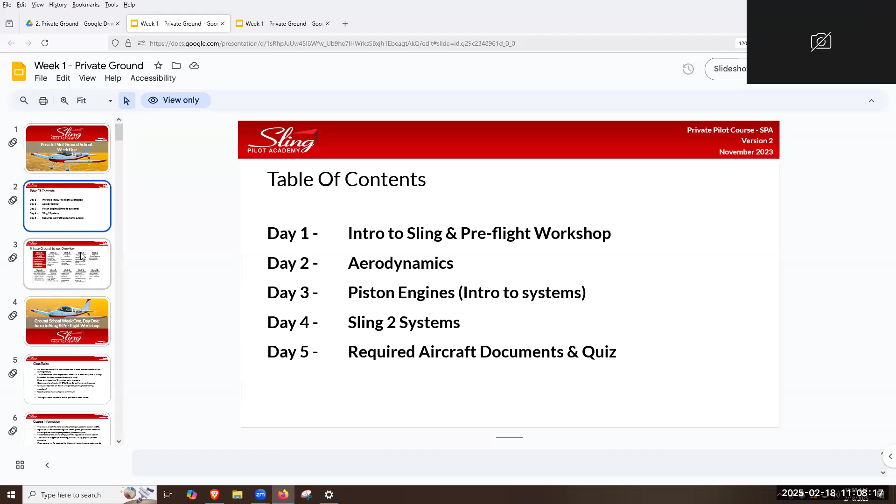Okay, so here we are on day two of week one. We're going to be covering aerodynamics. Yesterday we went over the intro to Sling and all the housekeeping stuff, and we did the pre-flight workshop. Hadley, I'm sure you did your pre-flight with your instructor yesterday. We need to do another walkthrough, we can. Today will be aerodynamics. It's kind of a bigger topic, so we have a lot to go over. I think we should be able to get through all of it today, but we really want to take our time through it and understand it. It's one of the more important topics, so we'll try our best to get through it, but take our time.

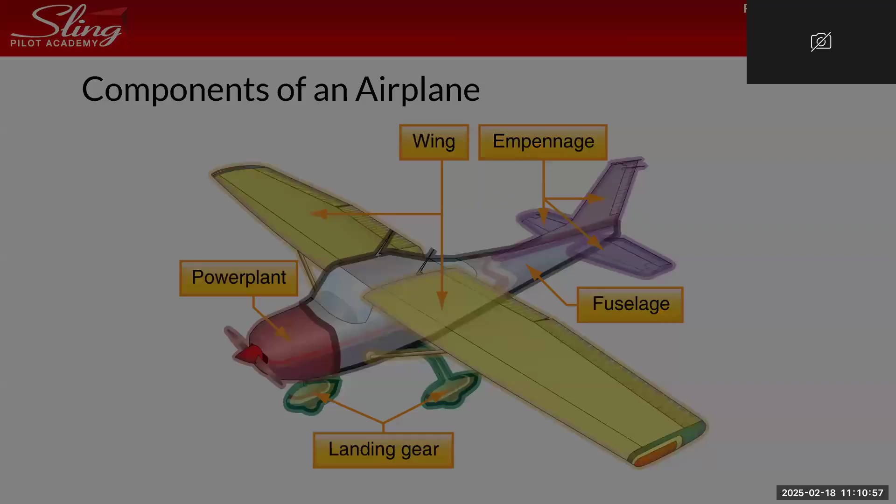And I heard that the last IFR class that just happened, she got a standing ovation at the end. So I'm not saying I expect that, but I expect that.

So let's go more in depth on the fuselage and the empennage.

Right here on the empennage, from this component back, we have different surfaces. The horizontal stabilizer is that horizontal surface that runs through the fuselage. During the pre-flight, you can press down where the rivets intersect on the horizontal stabilizer, and you can literally lift the nose of the airplane up. That's how light it is.

Attached to the horizontal stabilizer is the elevator. The elevator is controlled with the control stick, the joystick, with that forward and back motion. So the elevator is what controls your up and down motion.

Attached to the elevator, we have a trim tab. In our airplane, the trim tab is electronic. So once we get more into systems, you'll learn how the generator powers the battery, which powers the trim tab. On our joystick, there's going to be two buttons.

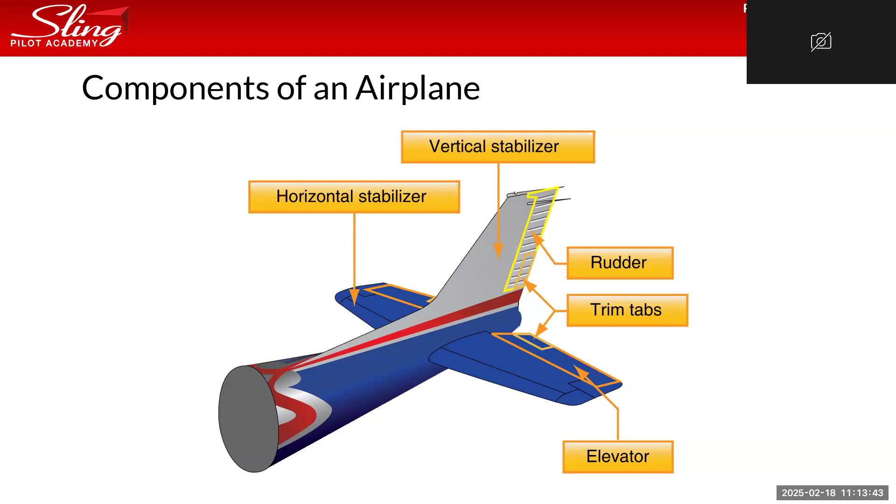Next we're going to get into the four forces of flight. These four forces are happening continuously at all times during flight. We'll go a little more in depth about them right after this picture. But essentially we have thrust, which comes from the power plant and the propeller. That's what moves us forward through the air. That is opposed by drag. There's different types of drag, which we'll talk about.

Then we have lift and weight. Lift, there's some physics behind that, which we'll get into in a few slides. And then weight is essentially gravity and the weight of the airplane wanting to go down towards the earth. In straight and level flight, these are all in equilibrium. They all are equal, but in different phases of flight, one might be more than the other.

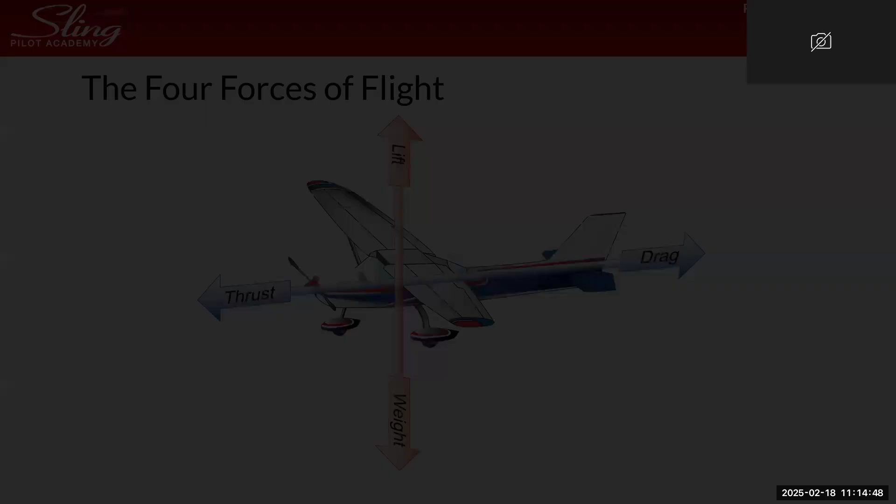So first we're going to talk about lift. Lift is the upward and vertical movement that opposes weight. You as the pilot control the lift, using the primary flight control, the elevator, with that forward and back motion. So you determine how much lift you want the aircraft to make or not make. This only occurs when the plane is moving forward, so you need airflow. The airflow is going to be present over and under the wings. We're going to talk about something called Bernoulli's principle and then the Venturi effect. That is the science behind how airplanes fly and create lift.

Bernoulli's principle and the Venturi effect create differences in pressure on the upper and lower surface of the wing. We'll talk about that in a little bit, and hopefully that makes more sense. Any questions about lift? No, cool.

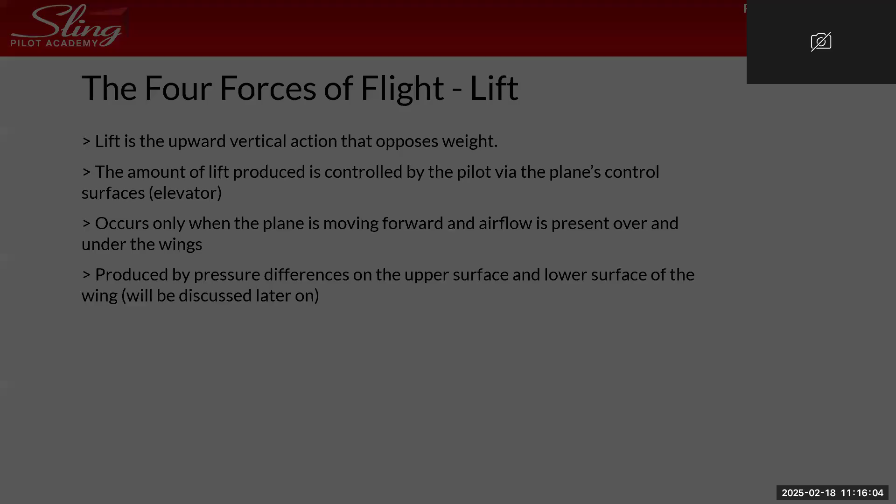So as mentioned, weight opposes lift. It has a definite relationship to lift, so it's always going to be there. It's just a matter of, are we producing more lift than we are weight? Lift always has to be more if we want to maintain our flight and altitude. Once we stop producing lift, that weight takes over and we start to descend. Lift is required to counteract the aircraft's weight. The aircraft naturally wants to go down due to gravity and due to the weight of the aircraft, so we have to generate enough lift to counteract that weight.

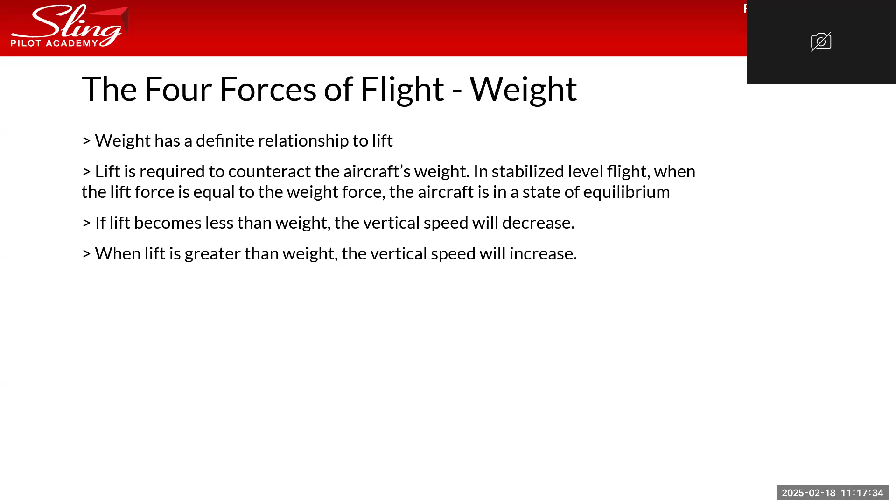In stabilized flight, when lift force is equal to the weight force, the aircraft is in a state of equilibrium. If lift becomes less than weight, the vertical speed will decrease, meaning we're going to want to descend. When lift is greater than weight, the vertical speed will increase, meaning we're going to want to climb or maintain altitude. When we learn about some of the instruments, you'll learn about the vertical speed indicator, an instrument we have in the cockpit on the G3X that shows whether we're climbing or descending. So more lift, vertical speed will increase and we'll climb. Less lift, when it's less than weight, our vertical speed will decrease and we will descend.

Next, we're going to talk about thrust. Thrust is that forward force, that forward motion, which is produced by the power plant, the engine and the propeller. This opposes or overcomes drag, which is that other force that wants to pull us back and hold us from moving forward.

For us to start moving, thrust must be exerted and it has to be greater than drag, otherwise we won't move. As we continue to move and gain speed, thrust and drag eventually become equal. Once again, equilibrium.

This is essentially just when the wings produce horizontal lift instead of vertical lift. So rather than that up and down motion, we have that forward motion.

Also, if you want me to pause, you guys can take notes on this, let me know. If you want me to go back a few slides so you could take notes on the other three, I can do that as well. Any questions on the four forces of flight so far? No? Good, good. Do I need to go back so you guys can take notes on those? We kind of went through them a little quick. Good, cool.

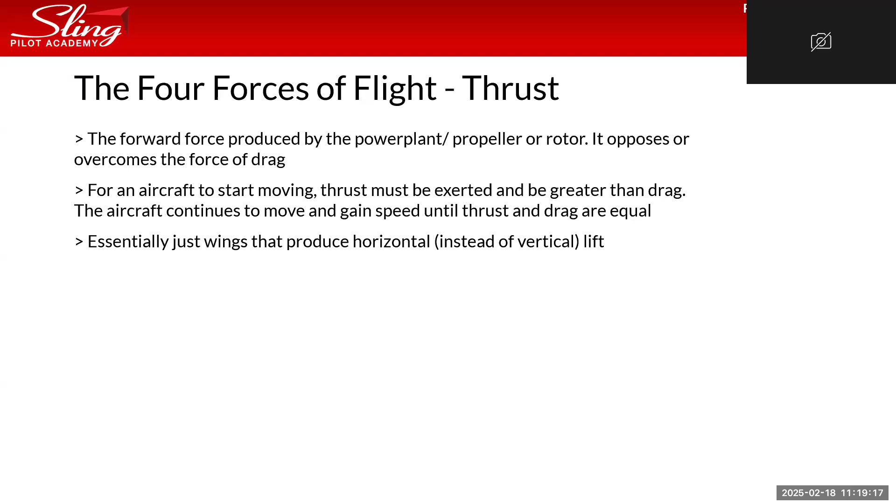So now we're talking about drag, which is the last of the four forces of flight. Drag is the force that resists the forward movement of the aircraft through the air. Once again, drag is always going to be there. There are ways that drag increases and decreases, but overall we need to have more thrust, more forward movement, than we do drag.

Different phases of flight will cause the drag to change. Every phase of the entire flight there's going to be drag, and the types of drag will change in different phases of flight. We can't get rid of drag, it's always going to be there. There's nothing we can really do to get rid of drag, that just comes down to how the aircraft is designed. We'll talk about these next two types of drag: parasite drag and induced drag.

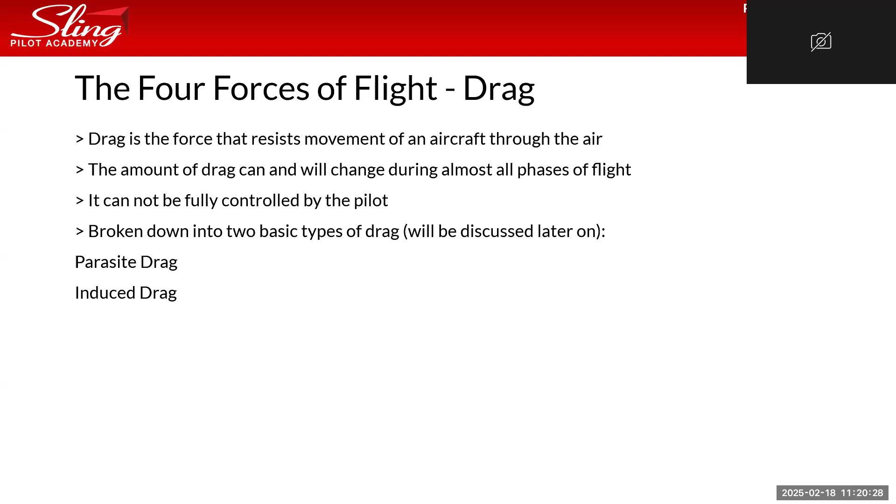All right, so going into how lift is created, there's something called Bernoulli's principle. Originally, when this principle was created, they used fluids as their experiment, specifically fluid dynamics, the movement of fluids. Bernoulli's principle states that an increase in the speed of a fluid, or in our case air, occurs simultaneously with a decrease in pressure or a decrease in the fluid's potential energy. So as that fluid or air increases in speed, the reaction is that the pressure will lower, it'll decrease.

The air flowing over the upper curved surface of the wing is traveling faster than the air underneath the wing, and I'll draw a picture to show that. This creates two different states of pressure over and under the wing. The way a wing is shaped is what causes this difference in pressure, and there are different components of a wing that give it its characteristics.

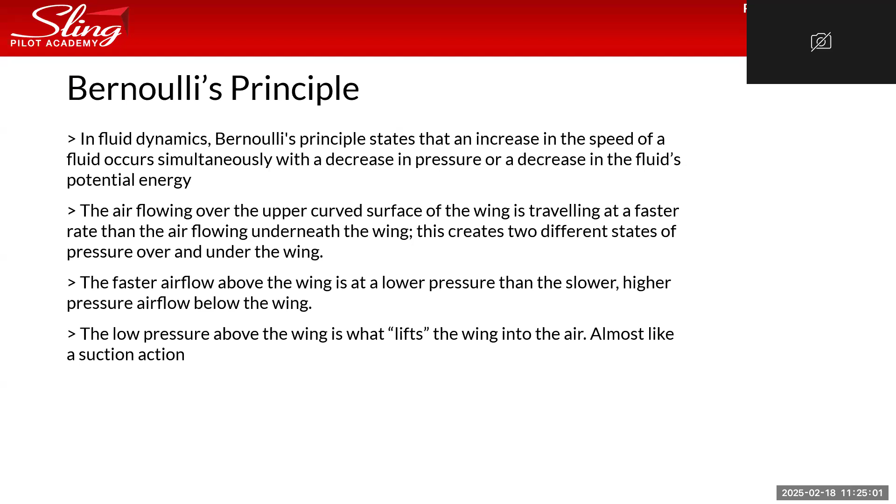Does that make sense? Is there any concerns or comments, questions about that? Good.

So another law of physics is the Venturi effect. Sort of the same concept. Once again, it was done with fluids, but essentially if you have fluid flowing through a pipe, wherever that pipe gets narrow, it creates higher speed. That fluid or that air is moving at a higher speed. And then once again, it results in a decrease in pressure, but a velocity increase. So it's essentially the same concept as Bernoulli's principle.

But both of these, the Venturi effect and Bernoulli's principle, are what creates lift. These are the smart scientists that have taught us how planes are able to fly. Originally, as I mentioned, these were done with fluid, but we were able to take that concept and apply it to aviation. Good? Yeah.

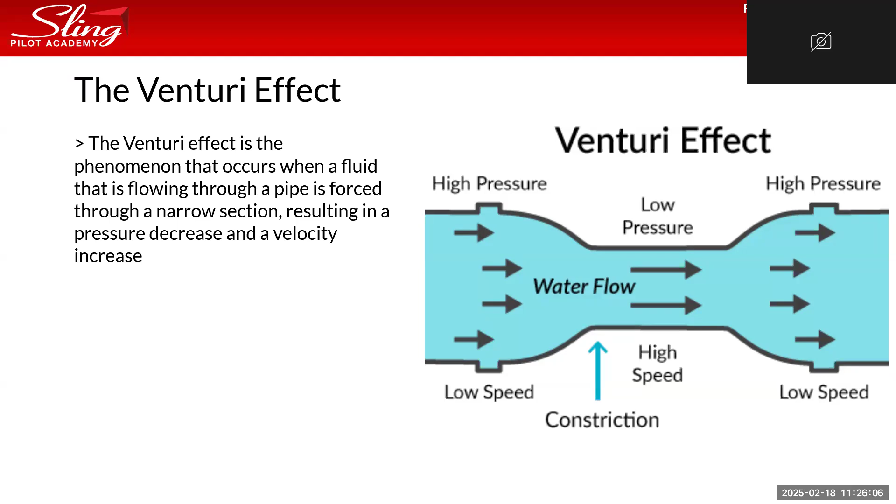So here's just sort of a diagram, kind of what I drew. It's the airfoil, or a wing. The top of the wing is curved, that camber. The air moves faster over the top of the wing to meet the air that's flowing underneath the wing at the same time, at the same place. Lower pressure is created on top, and therefore the air on bottom is higher pressure and wants to push the wing upwards.

So when somebody asks you to talk about how lift is created, you could talk about Bernoulli's principle, the Venturi effect, and Newton's third law.

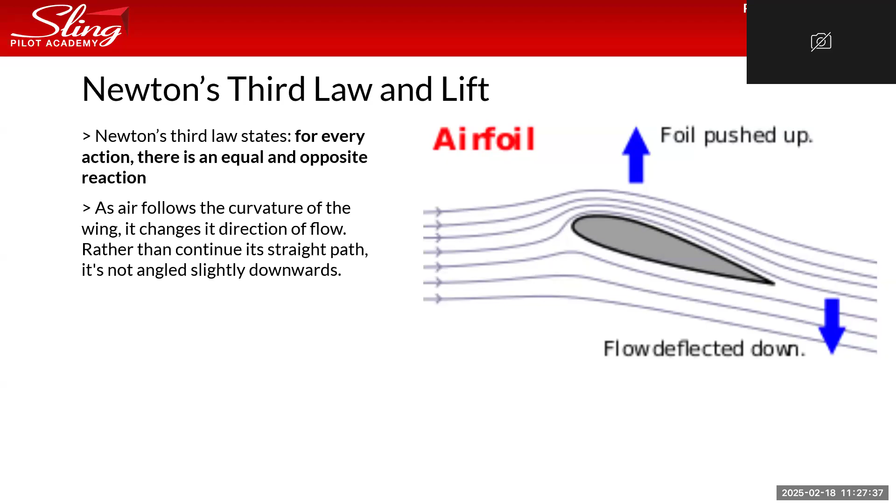So this is the lift vector, aka the components of a wing. We have our airfoil here drawn, it's more curved on top. You're going to hear a term called a chord line. The chord line is not a physical component of the wing, it's an imaginary line, so it's not actually there. But the chord line is just an imaginary line drawn from the trailing edge of the wing to the leading edge of the wing, a straight line from back to front.

Next, we have the relative wind. The relative wind is just the air, the wind that's coming in the opposite direction of what we're moving. So if we're going this way, the relative wind is here. If we're going up like this, the relative wind is there. If we're going down like this, the relative wind is coming this way. So all it is, it opposes our direction of flight.

Next, we have lift and drag, which where they meet is our center of pressure. That's going to be where all the pressure is on the wing and lifting upwards. Lift and drag, as we talked about, are two of the forces of flight, so both of these are acting as we're moving forward and trying to generate that lift. In between the lift and drag is the resultant force, and that's the direction that the wings are pushed upward.

So we have our leading edge and trailing edge, and then the chord line. Leading edge is just the very front of the wing, trailing edge is the very back of the wing, and our chord line is that imaginary line that goes from the trailing edge to the leading edge. It's the imaginary straight line drawn between the leading edge and trailing edge of an airfoil or wing, in the direction of the normal airflow, and it's referred to as the chord line.

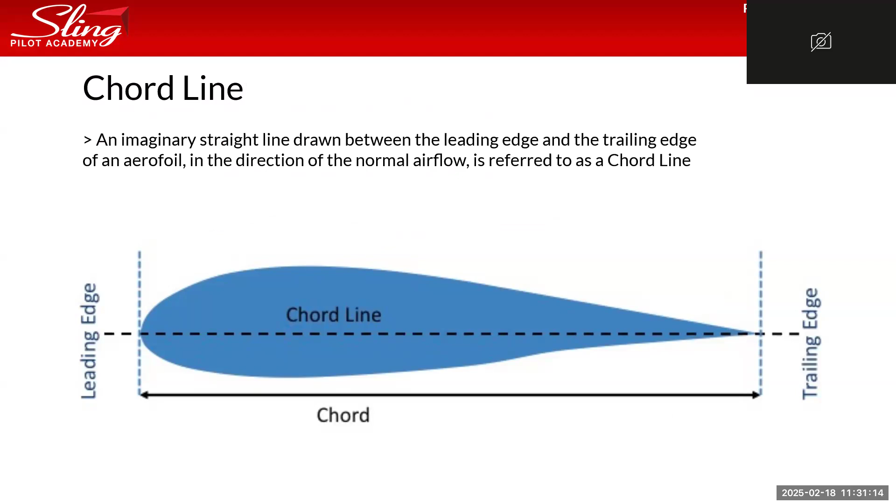So this is like the diagram I tried to use with my hands. As the airfoil direction is moving horizontally, that relative wind is in the opposite direction. As the airfoil direction is moving slightly down, that relative wind is exactly opposite, moving slightly up. When our airfoil is moving in an upward motion, that relative wind directly opposes it, moving in a downward motion. So wherever our airfoil's direction is going, the relative wind is exactly opposite of that.

And you see how the chord line stays the same, right? It's still from the trailing edge to the leading edge in all three diagrams. That doesn't change. The chord line is still going to be from the trailing edge to the leading edge.

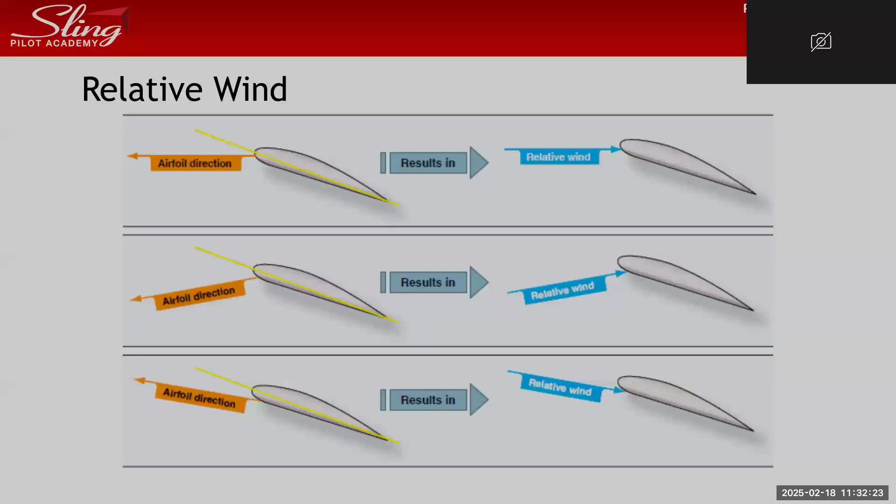Another term you're going to hear is the angle of attack. For those of you who have done the pre-flight, you'll see on the pitot tube that there are two holes: a bigger one in front for the dynamic air to move into the pitot tube, and a tinier one near the bottom, which is our angle of attack indicator.

Angle of attack is simply the angle between the chord line and the relative wind. As you see in this diagram, our wings are angled up, so that chord line angles up. That angle between the relative wind and the chord line is the angle of attack. In this diagram, the relative wind is exactly horizontal, meaning our airfoil is moving exactly opposed to that relative wind.

Your angle of attack can increase or decrease based on your use of the elevator. If we push the nose down, we decrease that angle of attack. If we give it back pressure, we increase the angle of attack.

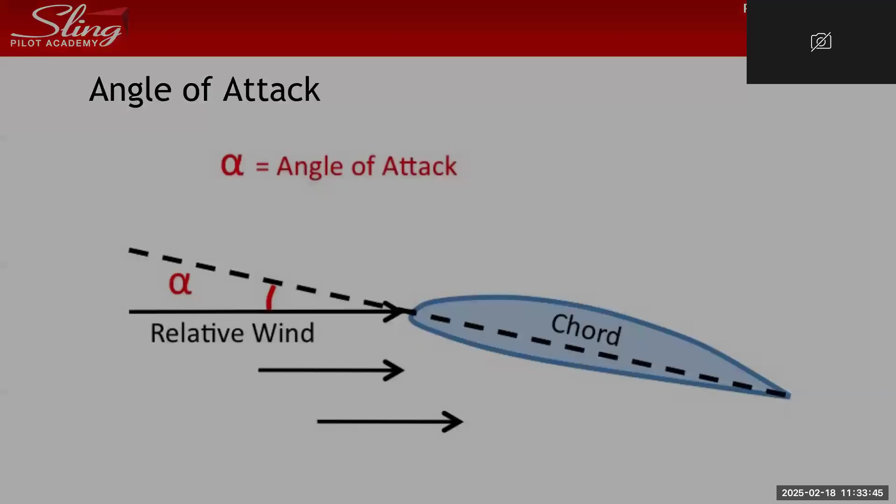We have another control surface called flaps. Flaps are a secondary flight control, also electronically powered. We have a little notch directly to the right of the G3X, right here, and we have three different flap settings. We can have it fully up, or flaps 1, flaps 2, or flaps 3.

When we add flaps, that can change our angle of attack. As you see in this next picture, we have the flaps extended, versus this first picture where they're retracted. That chord line, the imaginary line from trailing edge to leading edge, is still going to be from here to here, giving us a certain angle of attack.

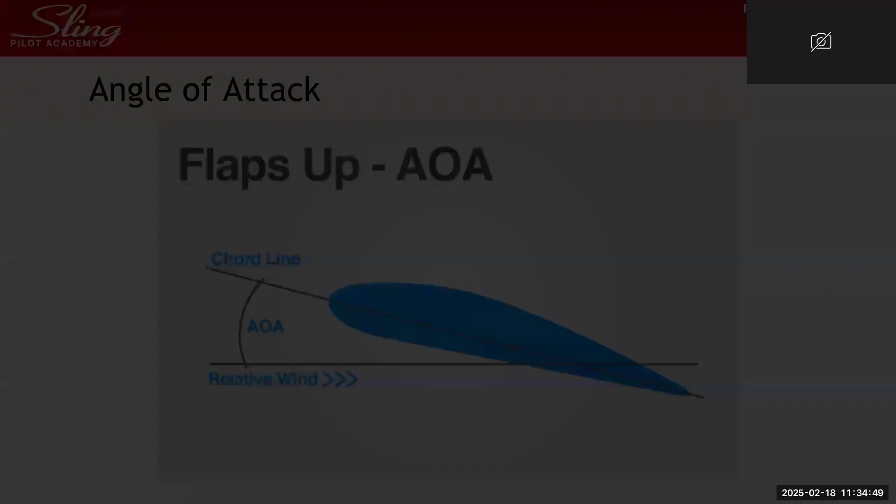As we add flaps, those flaps come down, and the more flap settings we add, the more the chord line changes. With flaps fully down, that trailing edge is now here versus up here, so we have to draw a new imaginary line from trailing edge to leading edge, and that increases our angle of attack. So flaps retracted gives a lower angle of attack, and as we extend those flaps with each setting, it increases that angle of attack more and more.

Make sense? Everybody good? Tough crowd.

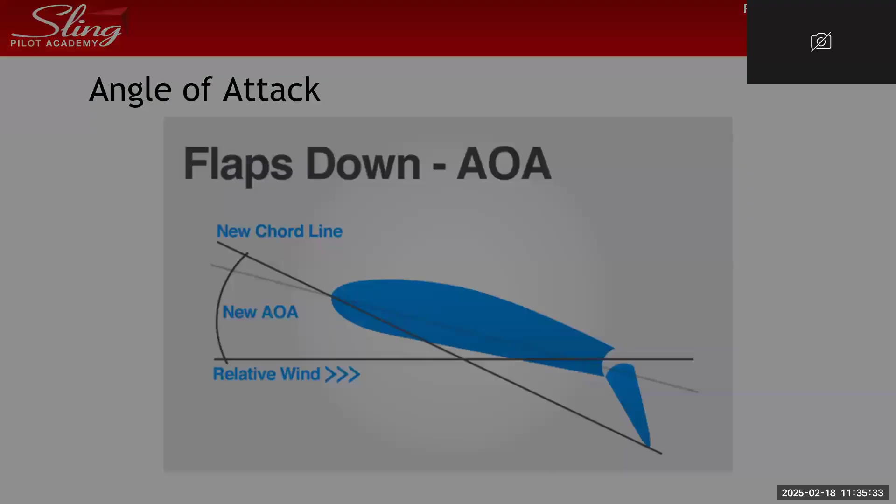Stalls. A lot of people think of a stall as a bad thing, but it's going to be part of your training—private pilot, commercial, CFI, multi-engine. You need to understand how to identify and recover from them. At an airline you'll never do a stall on purpose, but you still need to know how to recover from it.

A stall is when you exceed the plane's critical angle of attack. That's generally around 15 to 17 degrees on normal general aviation aircraft, though it's different for every airplane.

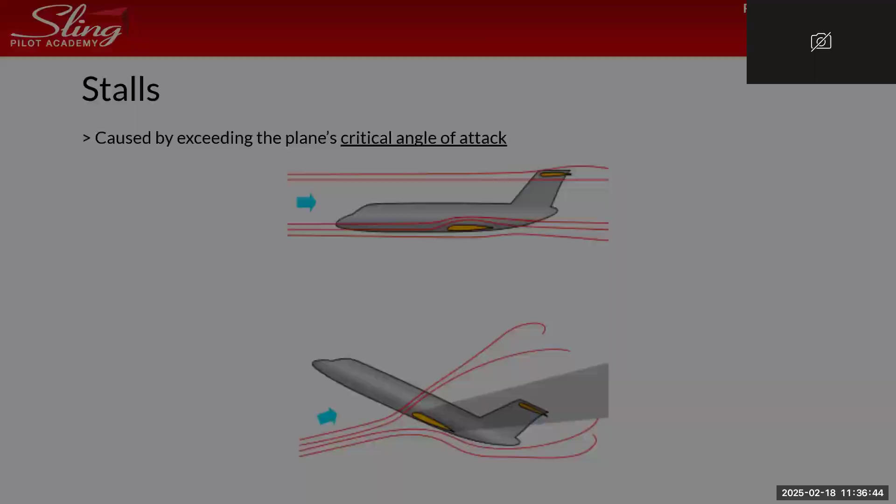When you exceed that angle, the wing stops generating lift. Normally air hits the leading edge, stays right on top of the wing surface, and flows smoothly across to the back. But when you increase the angle of attack too much, that air hits the leading edge and separates from the top of the wing, disrupting the production of lift.

That faster moving air that normally creates low pressure is no longer doing that, because it separates from the wing surface. So we lose that low pressure and the lift it produces. A stall is the loss of lift due to exceeding the critical angle of attack, causing airflow to separate from the wing.

I'm going to play this video—it's only a minute long. It just shows what happens.

You see all this yarn taped to the wing, flat up against it—that air is smoothly flowing over, staying tight to the wing. But as this person slowly increases the angle of attack, watch what happens to the yarn. You see how it's starting to move now? Look at that. Then as they decrease the angle of attack, it goes back to normal.

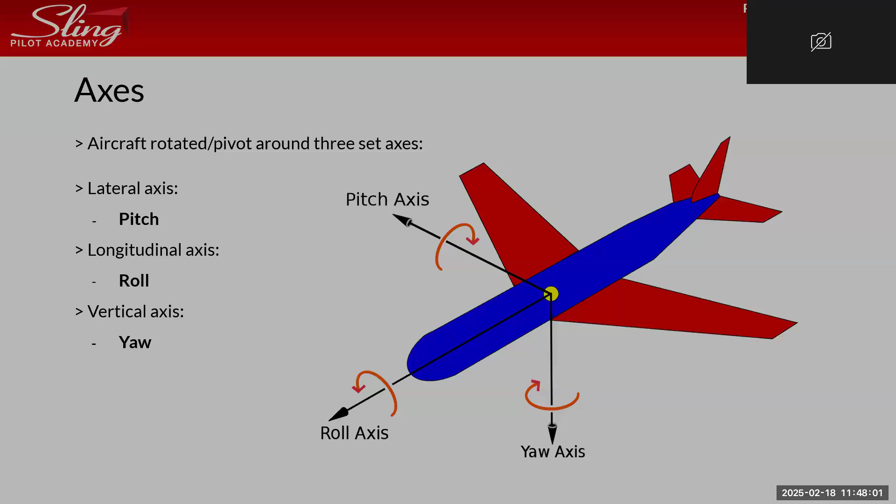So I'm going to do some quizzing now. What does the elevator control again? The elevator is controlled with the joystick forward and back. And the ailerons are controlled with the joystick left and right. Yes, yes.

So what are our three axes? Without looking at notes—horizontal axis, another name for it... oh wait, no, that's a stabilizer. I don't know yet, anybody want to try? Three axes: longitude, latitude... oh yeah, vertical. So vertical, the longitudinal, and then the lateral.

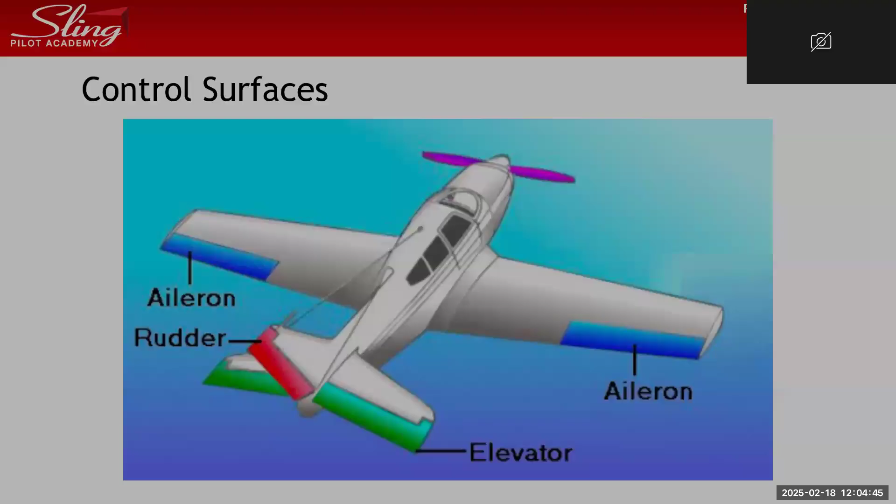I have a video from when I did mine, I had the Ray-Ban glasses on, so after break we can go over that. That's scary. I got a little motion sick, not gonna lie, but it was fun. It was a super hazy day, so you couldn't see the horizon, which makes it even worse, more susceptible to motion sickness. It was a good time though. It's called a super decathlon. Is it bi-wing? No, it's a tail dragger though.

So is it like in spin training? I'm gonna find it. It was literally when I was flying today, I was like, let's see if I can get a video of the right time. See if I can, I'll find it, but I still just wanna see.

How many sessions do you do with spin training? You do like a flight, a 3 hour ground, and then one flight. Who does that instruction part? Some guy, Armando.

I feel like I'm just a very specific person, like watching YouTube videos for the weather and hearing what they're saying. I literally just watched YouTube and replayed the same lesson video, writing it down, because at first they talk so fast. Now I can handle it, it's easy, I can hear everything, but at first I was like wait what. They were saying it and I missed everything. I just listen to it and try to get what I can. There was one video, I'll send it to you when I find it, and I literally just replayed it over and over and wrote it down, and then I loved it.

What would that be for? Like I didn't get the text message, it's just the weather calls. I don't know if you hear it, they talk so fast, and like when I first ever went up in the plane, I was like wait what are they saying, what's your last name? Then I just watched videos over and over, and then obviously now I know.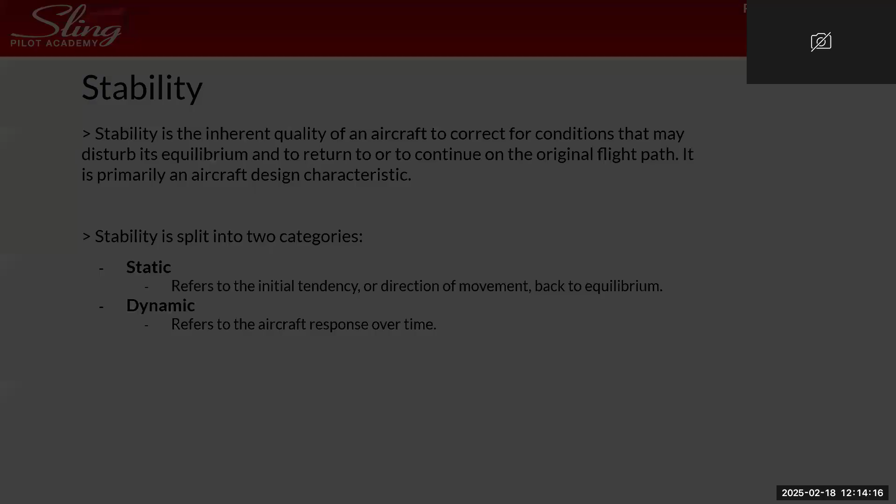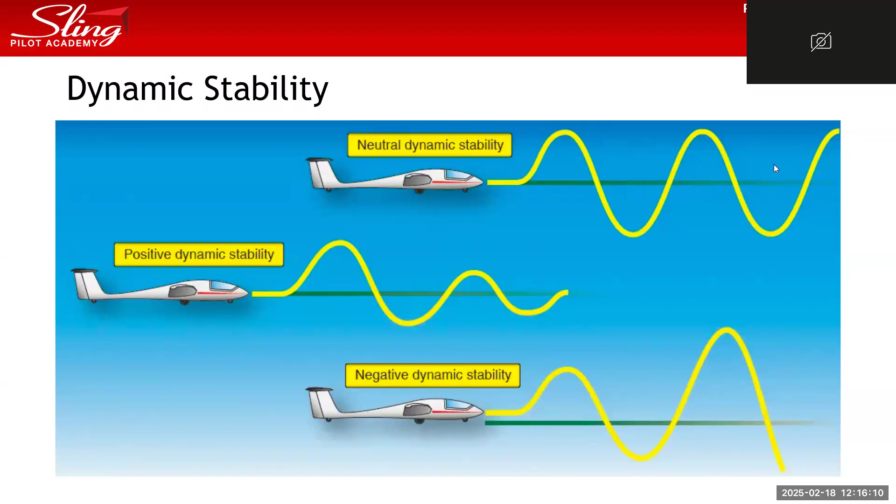The one we want is positive. The one we really want to avoid is the negative dynamic stability. Next, we have static stability. Once again, there's three types: positive, neutral, and negative. The one we want is positive. The one we really want to avoid is the negative static stability.

Isn't that something you control with the stick? Are you saying that initial disturbance or the recovery? Like the recovery - so obviously, yes, you as the pilot are going to want to recover from that. But the stability, the more stable an aircraft is, the better it is for training purposes.

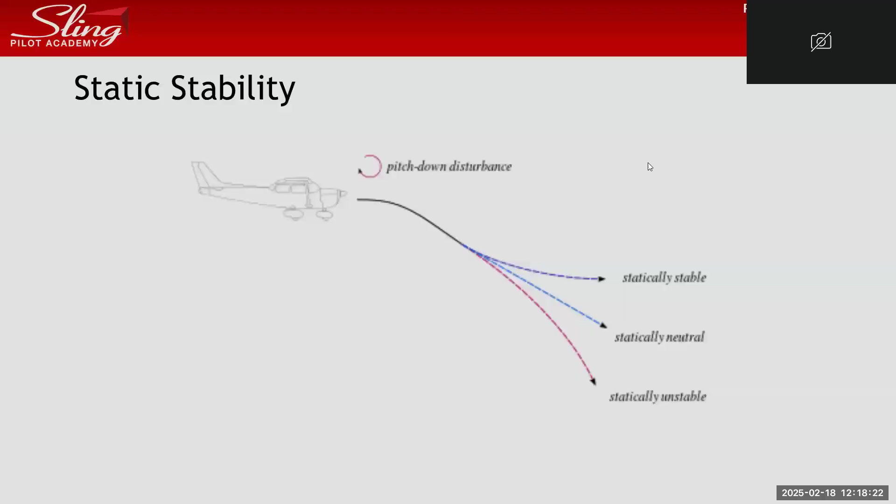So now we're going to talk about the forces in a turn. We've talked about lift, but all forces can be split into a vertical and horizontal component. So in straight level flight, when our plane is not turning, all our lift is vertical. It's keeping us in the air - there's no horizontal component of lift.

As we start to bank the aircraft in either direction to start a turn, a part of that vertical component is going to turn into horizontal component. So as we bank left, our vertical component slightly decreases - it's still keeping us up, but now it's split into horizontal component, which pushes the aircraft into the turn. The steeper you make the bank, the more vertical component you lose, and you're going to have to give it back pressure to maintain altitude.

If you start a turn and don't give it any back pressure or pitch up, it's going to want to descend. So when you're going on turns like that, you don't necessarily need to turn the plane much, you just need to give it a lot more back pressure. The steeper your turn, yes.

So like when you learn the steep turns, it's 45-degree bank. Your bank angle is really high, so that vertical component of lift is going to decrease, but it's going to allow you to turn - that horizontal component is increasing. You're going to have to give it back pressure, otherwise it's going to descend.

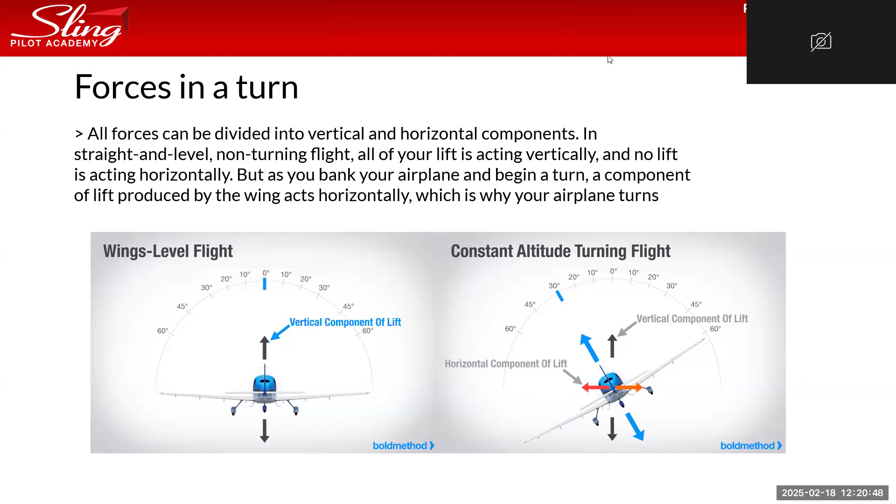Continuing with the forces in a turn, if you're only using ailerons, your vertical lift decreases and your horizontal lift increases. So you tend to descend. The more you bank, the more that vertical component decreases and you're going to descend. So to keep your vertical lift the same and not descend, you have to increase your lift by using the elevator to give you that back pressure, pull the stick towards you, increase that angle of attack.

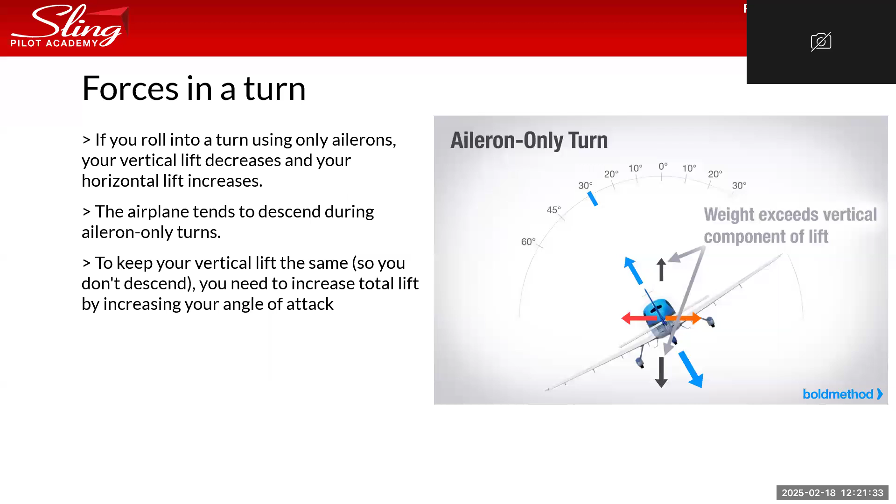This is now when we start to talk about load factor that you mentioned earlier. As you increase your bank, your load factor is also going to increase. It's essentially the ratio of your total lift and weight. As you increase that bank, the ratio increases and therefore the load factor increases.

So you guys may have heard of a term called Gs or G-force. That's the feeling of getting pressed into the seat. That's going to increase, and if it's increasing on you, that means it's also increasing on the aircraft, the structural component of the aircraft. So the higher the load factor, the more chances of damaging the aircraft.

So whenever we're recovering, in terms of spin recovery, we leave the ailerons neutral, use rudder to come out of the spin, and now we're in a nose-down attitude, so we want to just use back pressure. If we're still banked like this, you have to level the wings first so you don't put a lot of load factor onto the wings. You'll learn that with unusual attitudes.

It's pretty much when your instructor will have you close your eyes, they take controls and put you into a weird attitude, and you have to recover from it. When your airspeed's increasing and your nose is down and your wings are banked, you have to level those wings first before you pitch up, you have to decrease that bank. Because the more bank you have, the more load factor, the more stress on the aircraft itself, which increases the chance of damaging the aircraft.

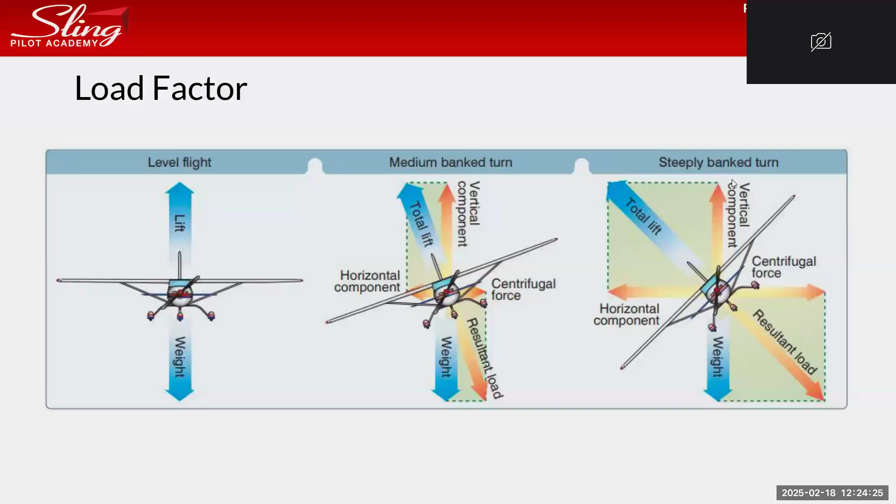This is a chart you're going to see in your King School training. A lot of the practice questions will have this. It essentially shows the comparison of your bank angle to your load factor, or G units. As you increase your bank angle, that load factor or G units also increase. So the less the bank, the less the load factor. The more the bank angle, the more the load factor. You're going to see this chart a lot in your King School, so you'll become familiar with it.

A lot of the questions we'll ask will be, if you're in a 45-degree bank, what is the load factor going to be? All you do is come over here to roughly 45, go up, and it's about 1.5 Gs.

So adverse yaw, what is yaw? What direction of movement is that? You can demonstrate this. Yaw is the nose moving left and right. That's roll, when it moves this way. And then this one is pitch. So with yaw, that movement of the nose, which is controlled by the rudders, there's a term called adverse yaw.

Adverse yaw happens when we start to make a turn and we don't use rudders to keep coordinated. Normally, when you make a turn, if you're going to bank to the left, you have to give it a little bit of left rudder.

If you bank to the right, you'll have to give a little bit of right rudder. And the reason for that is it's a natural thing that occurs, and we don't want it to happen. So that's why we have to use rudder to stay coordinated.

Adverse yaw is a tendency of the nose to want to go in the opposite direction of the bank. So if we start a turn to the left, adverse yaw is going to push the nose to the right. If we start a turn to the right, adverse yaw is going to push the nose to the left. That's why we use rudder, same rudder in the direction of the turn, to keep the nose following the turn rather than going out like this.

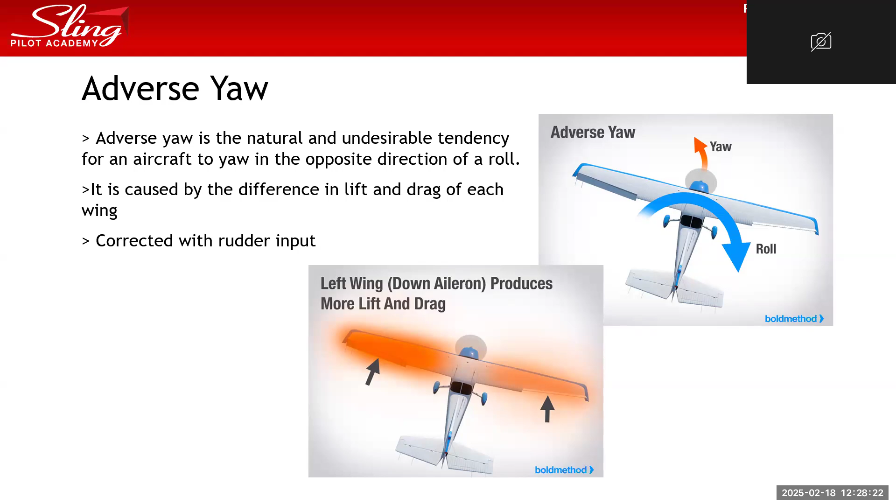Turning tendencies, this is going to be one of the.

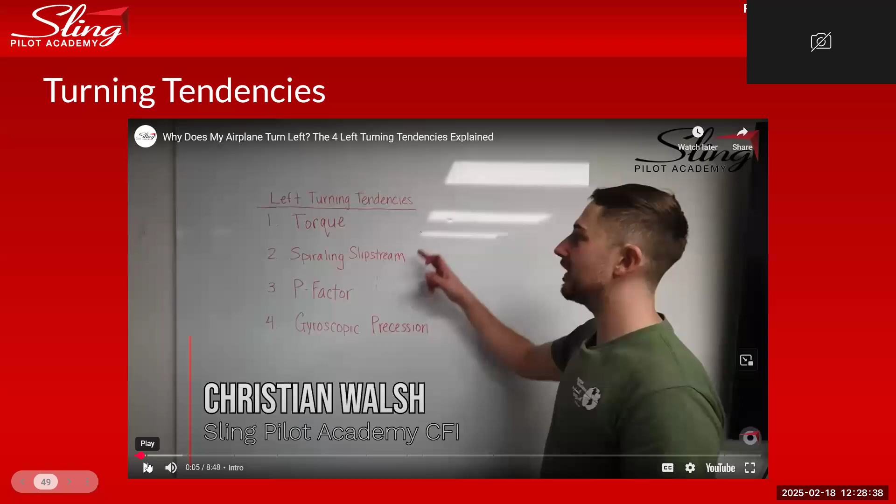So there are four turning tendencies: torque, spiraling slipstream, P-factor, and gyroscopic precession. I'll briefly talk about them and then we'll watch the video.

Torque is going to use Newton's third law: for every action, there's an equal and opposite reaction. When we're sitting in the cockpit facing forward, that propeller is going to be spinning in a clockwise motion, so from our view it's spinning to the right. So for every action, there's an opposite or equal reaction. Our propeller is spinning to the right, which means the body of the airplane wants to move to the left.

We're going to feel this torque effect a lot when we're on the ground, getting ready to take off. You're going to hear the term right rudder a lot. When you go full power and you're on the takeoff roll, the plane's going to want to roll to the left. The reason is because the propeller is spinning to the right, the body of the plane wants to spin to the left. It's putting more pressure on the left main gear and therefore causing it to roll to the left. So we have to correct for it with right rudder.

Spiraling slipstream is the air that comes from our propeller as it's spinning like this. That air is going to follow in a spiral around the fuselage and hit the vertical stabilizer on the left side, pushing it to the right, but pushing our nose to the left. So how do we correct for that? Right rudder. That right rudder will bring the nose back to center.

Hey everyone, my name is Christian Walsh, I'm a CFI here at Sling Pilot Academy. Today we're going to talk about the 4 left turning tendencies, what they are, and how they affect you in your aircraft. Number 1 is torque.

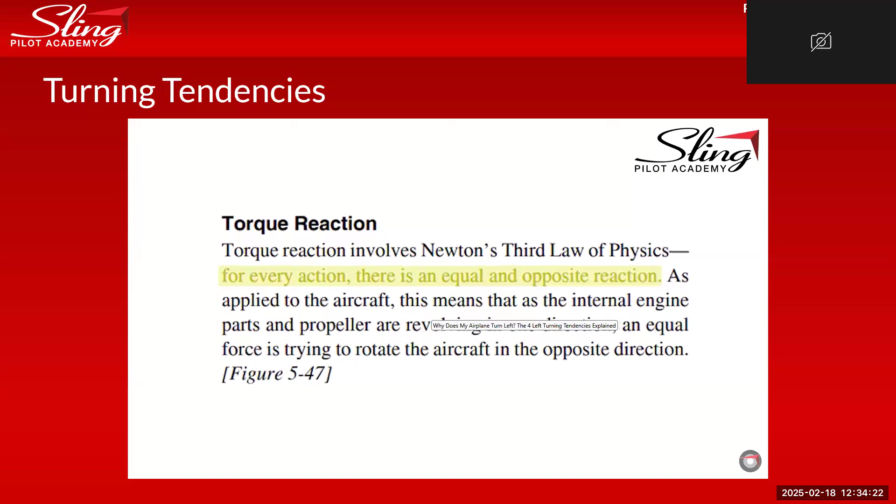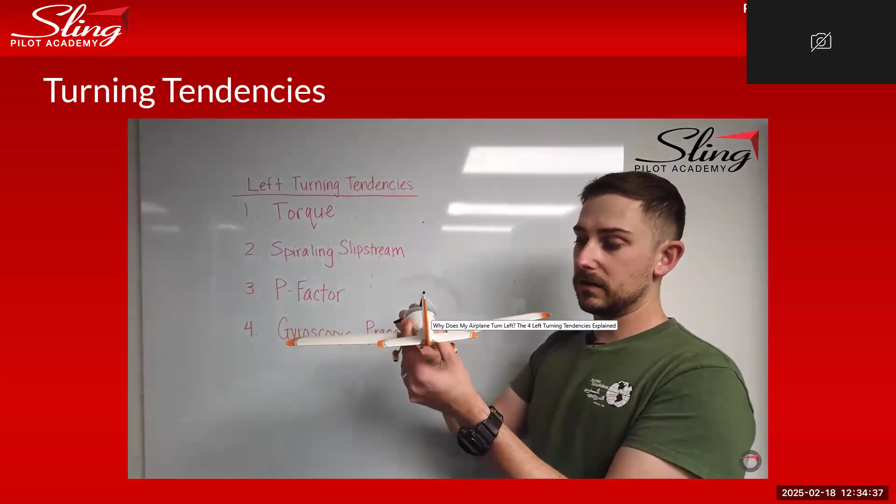For every force, there is an equal and opposite force, so the effect of torque is the opposite of what's happening with the propeller. From the pilot's perspective, the blades are turning to the right, which is clockwise, meaning the opposite reaction is going to be a left turn in the roll. So because of this clockwise turn, we have a counterclockwise turn of the aircraft — this is the equal and opposite reaction working together. Right turn of the prop, left turn of the plane. That's the effect of torque.

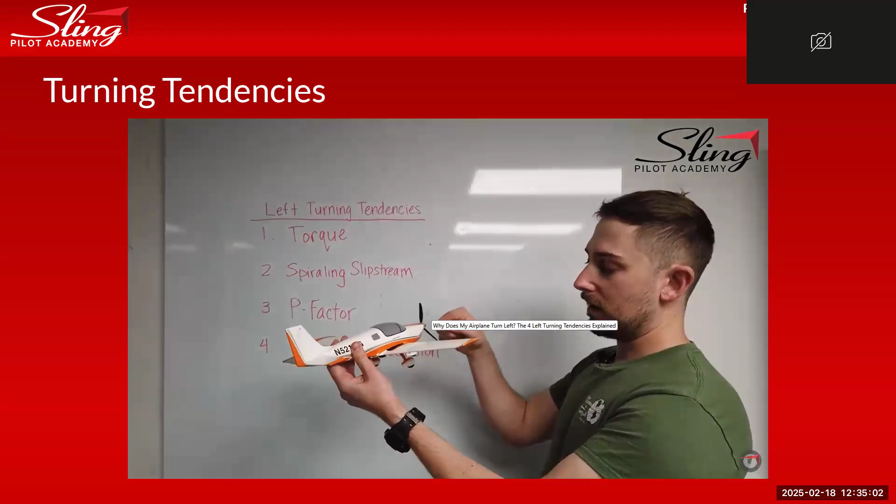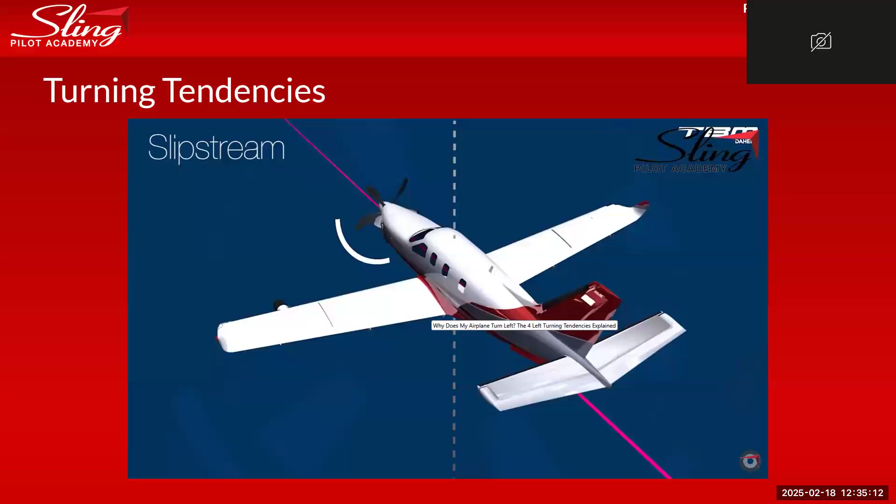Number 2 is called spiraling slipstream. In an aircraft, when it's moving forward through the sky, as this blade is moving around, it is creating this corkscrew effect — the FAA calls it a corkscrew effect. As the air comes through the blade, it goes over the airframe moving clockwise, spiraling around the aircraft like this. That's what's called the spiraling slipstream. Because of this turning motion and the spiral it creates, as it hits the vertical stabilizer, it pushes on the back of it and creates a left turn as well. So this is our second left turning tendency.

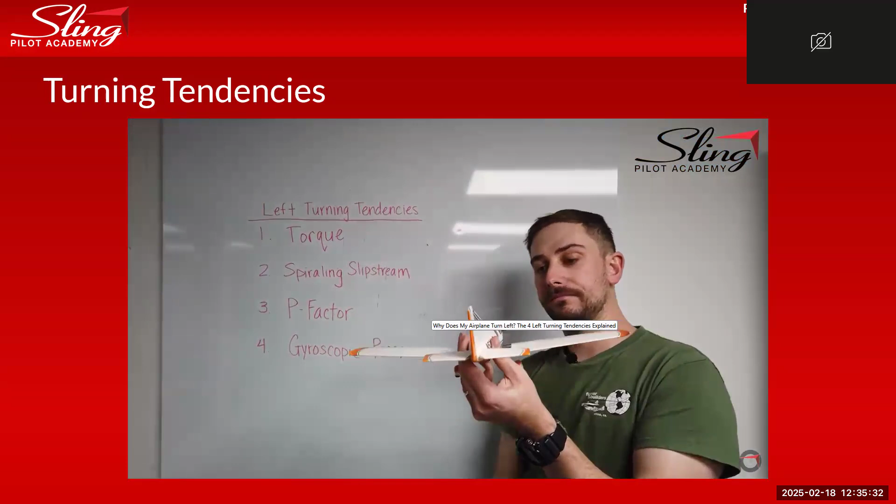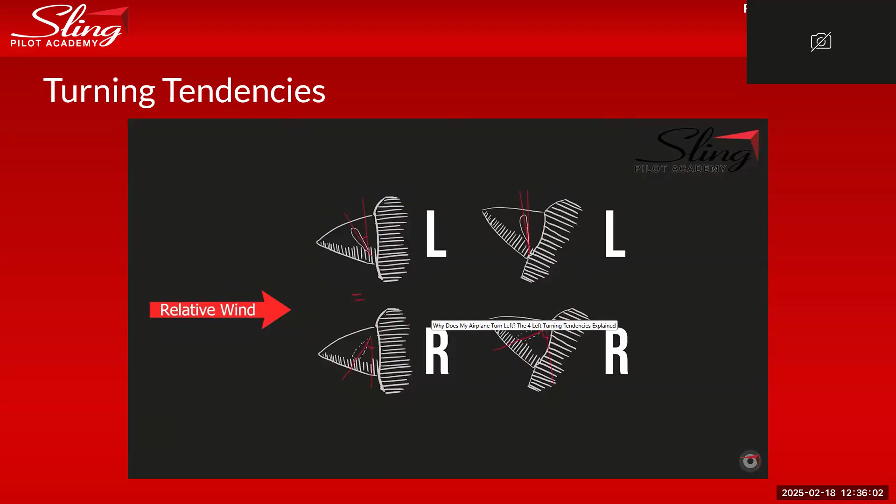Number 3 is P-factor. P-factor is the difference in blade angles to the relative wind. Simply put, when you're flying straight and level, the descending blade to your right and the ascending blade to your left both have the same effect, so the angle of attack to the relative wind stays the same. But when you change your angle of attack to the relative wind coming toward the aircraft, the right side has a much larger angle. This creates more lift on the right side of the propeller, causing the plane to yaw left.

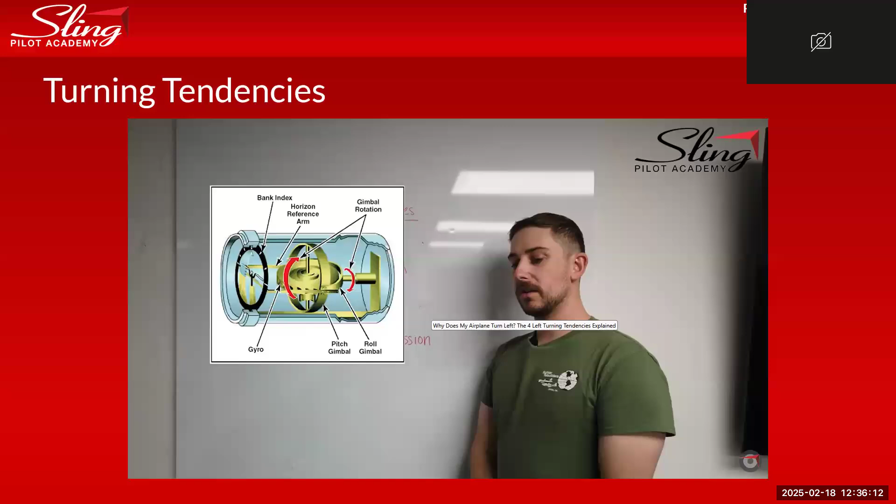Number 4 is called gyroscopic precession — just like a gyroscope in our six-pack of instruments, it's essentially a spinning disc. This isn't really a phenomenon that happens in a tricycle gear aircraft; it happens in a tail dragger. So when you're flying a tail dragger on takeoff, what they need to do is pitch the aircraft down so they can bring the back of the aircraft up and bring that tailwheel off the ground.

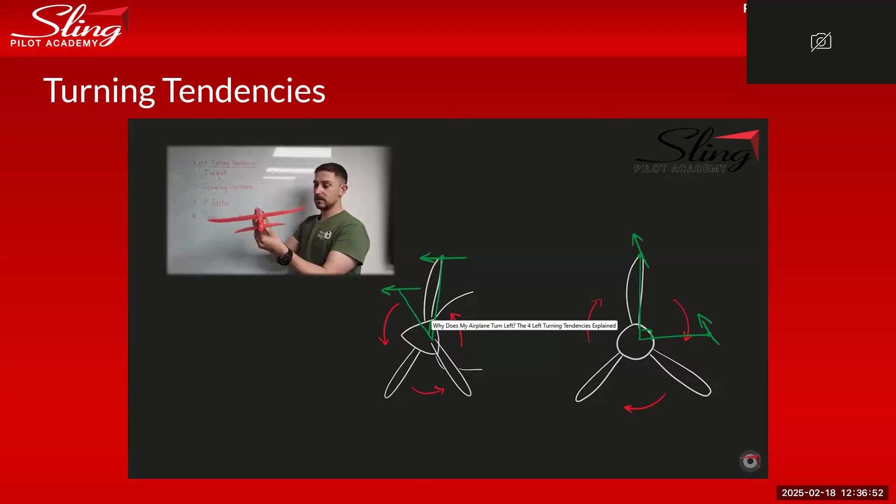When this happens, it creates a moment at the top of the propeller where there's a force applied. As that force is applied, it is felt 90 degrees from that point of origin. So if it's pushed here, it's actually felt 90 degrees to the right of the clockwise turning propeller, which gives us another yaw moment, another turning tendency.

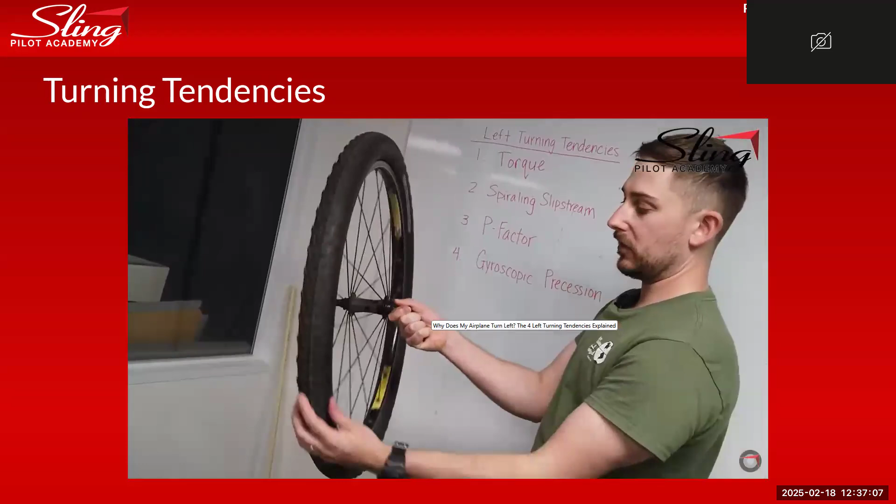Here's an example of this, one you might find in a normal classroom in aviation school. As the blade is turning to the right, if I pitch forward, it actually wants to turn to the left. This is involuntary from me. So if I do that again, spinning this forward, it turns to the left. This is how helicopters fly. It's all the same principle.

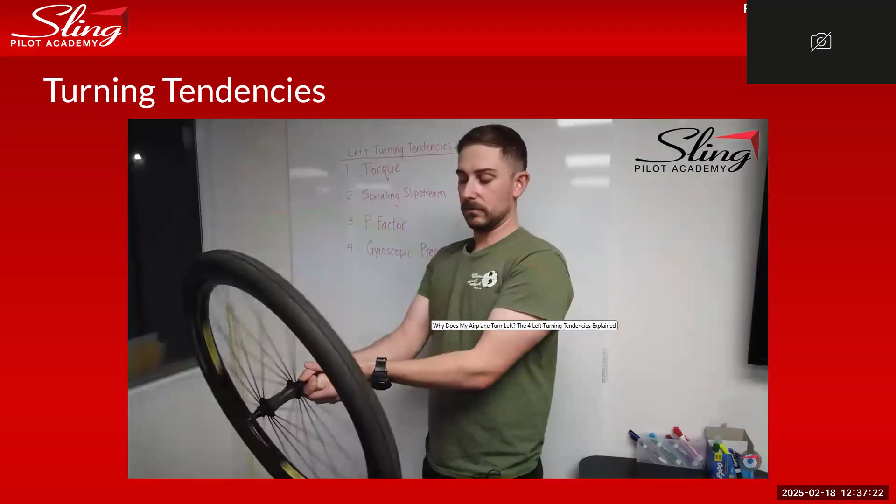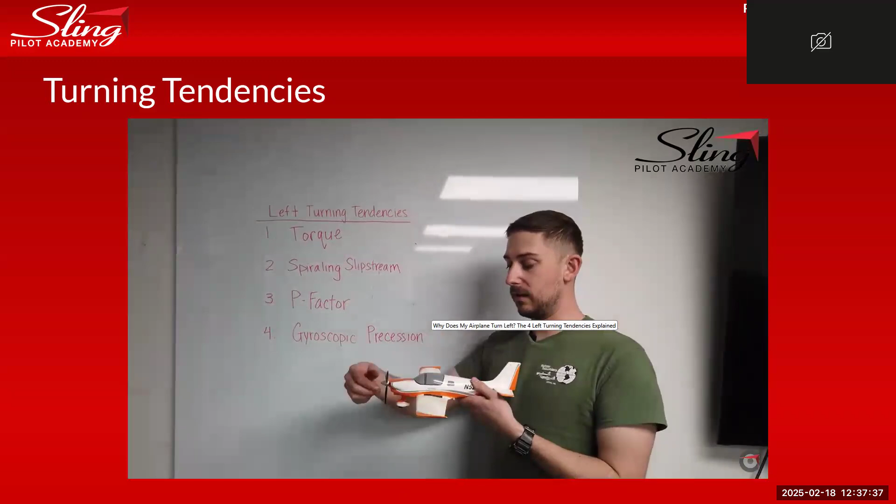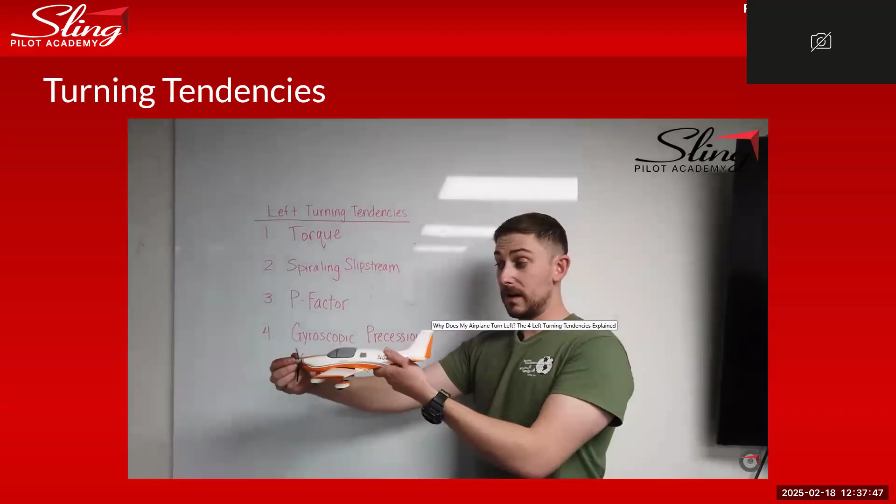Like I said, it doesn't happen in a tricycle as much or really at all, but this is important for a tail dragger, this principle. To summarize, all these four left turning tendencies that you see and feel in the plane don't happen all at once. They can happen at different phases of flight. But where these are most pronounced is when you're at a low airspeed with a high RPM, creating a lot of airflow and torque, which could be during the takeoff roll. So you have a forward slow speed with a high amount of air moving across the aircraft, and that's when you get these tendencies, which you counteract with a little bit of right rudder.

Now that we've gone over the basics, Sling Pilot Academy co-owner and aerobatic pilot Matt Liknaitzky is going to explain how these left turning tendencies are even more prominent while flying aerobatics.

We're really happy at Sling Pilot Academy to be adding a Super Decathlon to our fleet. The Super Decathlon will allow us to explore spins to a higher level with our students, pilots, and instructors, and will allow us to explore basic aerobatics and upset recovery training.

The pursuit of aerobatics is really important in your journey to mastering flight. Aerobatics allows you to explore much more of the envelope of flight than you do during normal flying. It takes you from below the stall speed of the airplane to its VNE, through all flight regimes, pitch attitudes, and bank angles, and allows you to really master flight to a high degree.

For example, learning about left turning tendencies can seem pretty academic and theoretical when you're just doing normal flight. During aerobatics, it becomes a very practical thing that you have to deal with and correct for at all times, and you become very aware of how they all interact with each other.

For example, in a simple aerobatic maneuver like a hammerhead, where we pull vertical, get very close to zero speed at the top, kick it over, and come straight back down again - during that one maneuver we start out at a very high speed, maybe 160. So when we pull up, we're at 160. At that speed, the aerodynamic forces our controls are able to exert on the airflow keep us straight and stable, counteracting a lot of the left turning tendencies we've been talking about.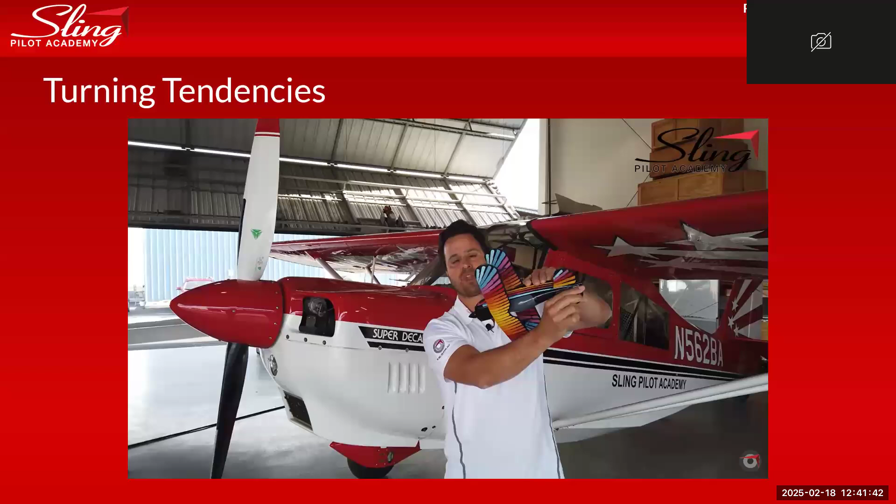To counteract that, as we kick full left rudder, we apply a decent amount of forward stick to hold the nose down, and that'll allow the airplane to rotate on its vertical axis and not flop out of the sky, then fly it downwards.

So in that one maneuver, as we've reached the top of the hammerhead, we've learned more about spiraling slipstream, gyroscopic precession, and torque effects than we could ever have learned theoretically from books or just academically. That's one of the reasons why we love aerobatics so much and why we want everyone to master, to some degree, the art of aerobatics and controlling the airplane through much more of its envelope than normal flight.

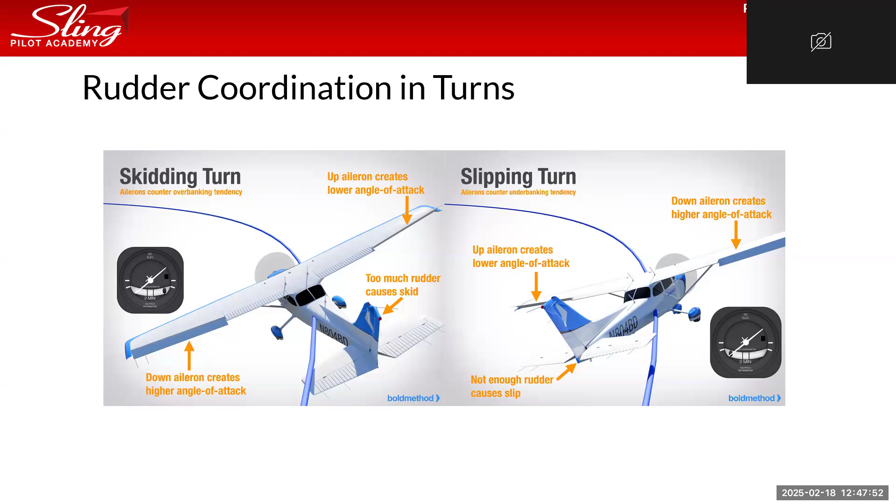All right, going into drag. There's parasite drag and induced drag, as we talked about earlier. The parasite drag has three types: interference drag, skin friction drag, and form drag.

Interference drag is due to different components of the aircraft body, typically where the fuselage and wings meet. The angle between the fuselage and the wing is where that interference drag happens. Essentially, it creates turbulent air, a disruption of air, and that's why we get interference drag. Notice on the pre-flight checklist there's a section to check the fairings. The fairings are the plastic piece in between where the wing and fuselage meet.

That's there to help reduce that interference drag. I believe the smaller the angle between the fuselage and the wing, the more interference drag we'll experience. The bigger the angle, the less interference drag. The smaller the angle, the more interference drag. I think there'll be a slide on it next.

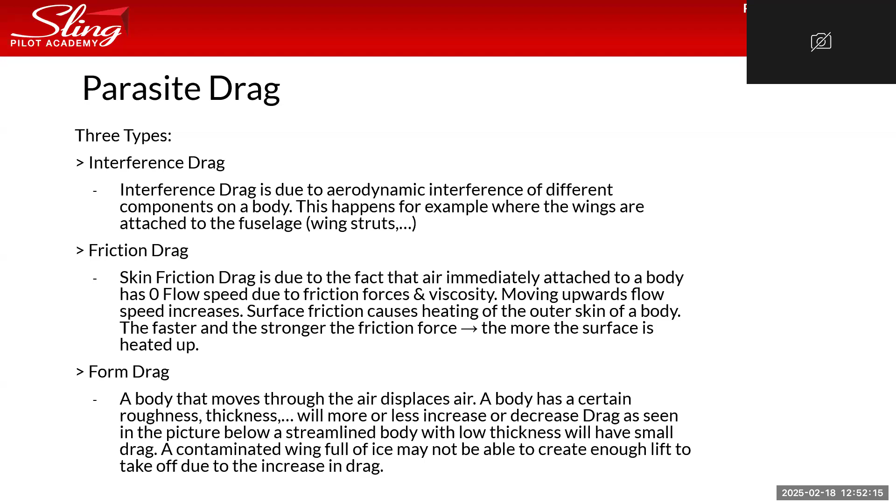The next one is parasite drag. Best way to explain it: think of a flat plate, like your hand outside the window held vertical, it's going to push your hand back. As you start to turn it, it becomes more aerodynamic and there's less drag, pushing your hand back a lot less. Same concept applies to how they design aircraft wings and fuselage to make them as aerodynamic as possible.

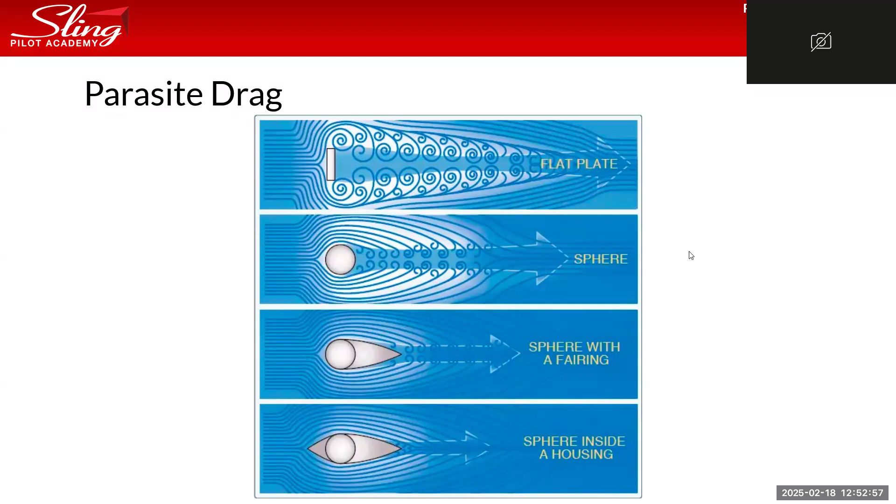The second type of drag is induced drag. You'll hear that this is a byproduct of lift. Induced drag is formed due to lift. As soon as the aircraft takes off, induced drag is created. It's a result of the pressure equalization between the high pressure under the wing and the low pressure above the wing. So the more lift we generate, the more induced drag we generate.

You'll hear something called wingtip vortices. These are rotating columns of air generated because of lift. They can be dangerous for other aircraft, so at times when taking off or landing behind a bigger aircraft, you might hear caution for wake turbulence. Wake turbulence is the result of wingtip vortices.

As the airplane gets heavier and larger, you'll hear the term heavy, clean, and slow. Bigger jet aircraft that are heavier and generating more lift are therefore generating more wingtip vortices. We'll go more in depth later on different ways to avoid wake turbulence when taking off or landing behind a bigger aircraft, but just know that induced drag is the byproduct of lift. As you create lift, you create induced drag, and bigger aircraft generating more lift create those wingtip vortices and wake turbulence.

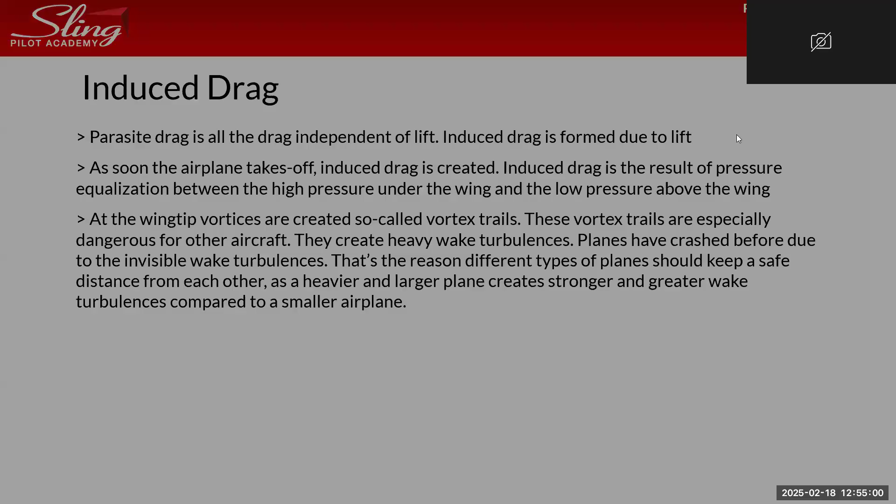Here's the thing I was talking about: the larger angle between the fuselage and the wing creates less drag, while a smaller angle, like below the wing where the landing gear attaches, creates more drag. The next few pictures are kind of goofy, showing that everything is somewhat aerodynamic, but certain things are less aerodynamic than others.

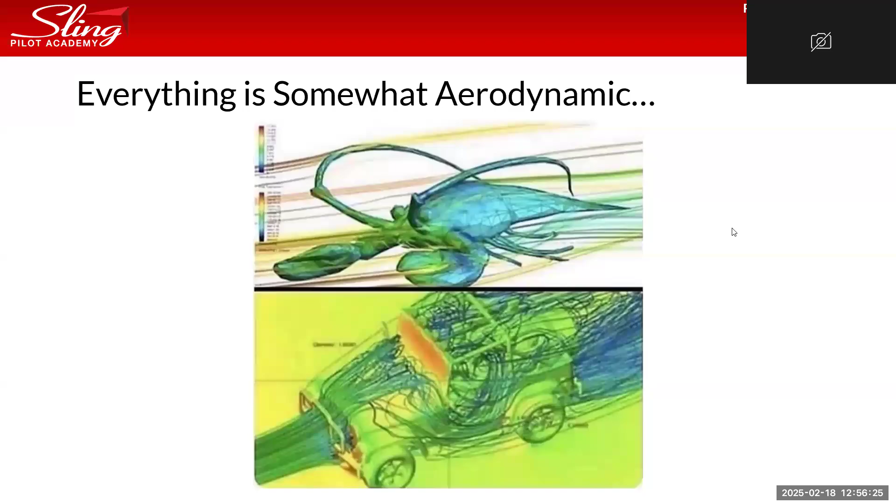That concludes aerodynamics. We still have like 4 minutes, so if you guys have any questions, now's a good time.

Wingtip vortices, do they travel outward and downward?

So let's say this is the wing from the side, and here we're looking at the plane from behind. Here's the root of the wings, here's the tip of the wings. The wingtip vortices rotate outward, inward, and then downward on each side. So wingtip vortices will sink over time. They don't just float in the air, they will sink down, eventually hit the ground, and no longer be a thing.